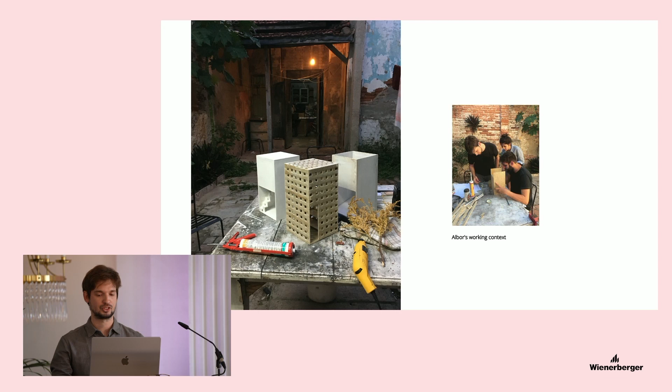In this sense, then, what brings singularity to this context is the union between the professional and the popular issues, propitiated by the absence of a legitimizing framework for the independent practice of architecture, which in the end we understand as experimental and not certified. In the absence of clear construction regulation and a hierarchy of competences, typically regulating relationships get to be managed at the level of words and practical actions.

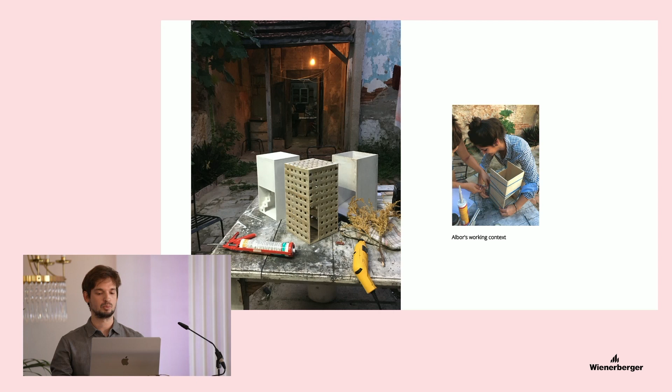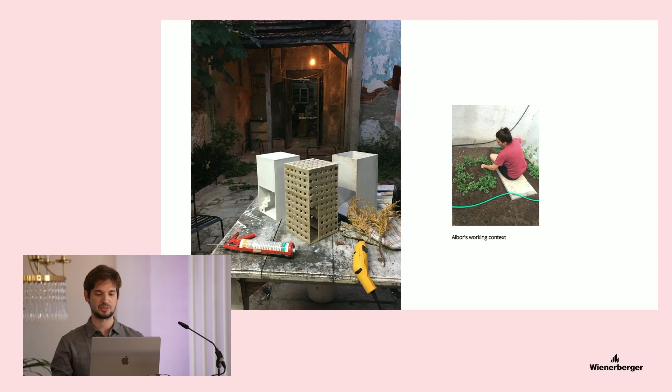Almost all the implicit professional hierarchies between the architect and the builder are diluted, and the usual sequence of the architectural project, the linear structure of conception, technical plans, and construction, is transformed into a directional multiplicity system.

The undermining of the construction tradition and the technical knowledge, together with the situation of the material market, make technical forecasting of solutions almost impossible. It determines that the presence of the architect at the construction site, as well as the close relation with the builder, is indispensable for the achievement of the architectural work.

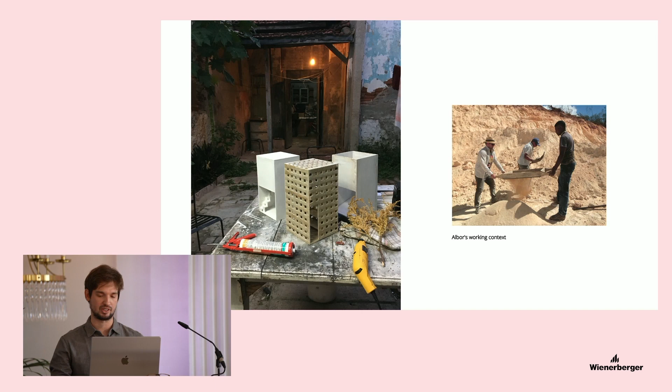Casa Torre, the project that we are going to speak about, catalyzed within the process of optimization and constructive adaptation of a reality that Albor has developed in recent years. The prospect of an uncertain future shaped the program of a single-family home for one of Albor's architects, a flexible and progressive house that is answered by raising a tower, a constructive core from which to overcome the challenge of the work.

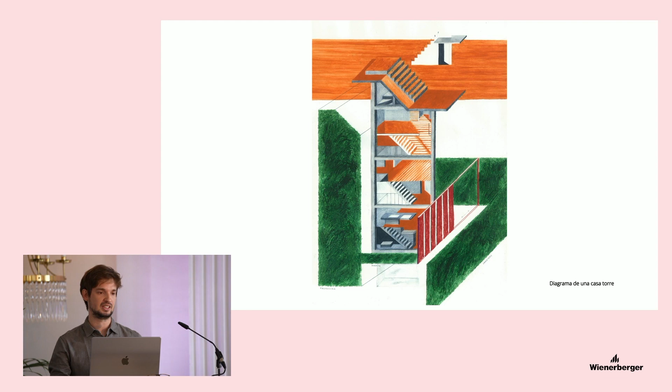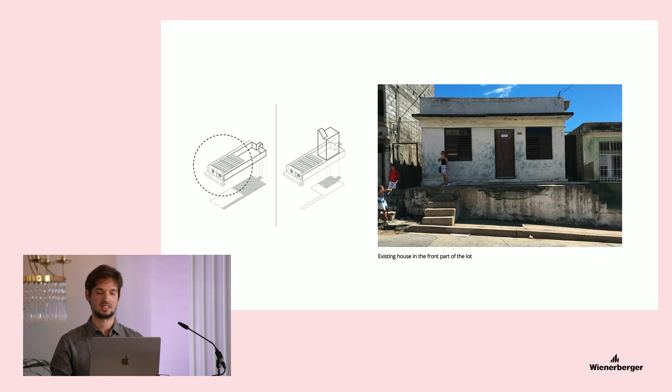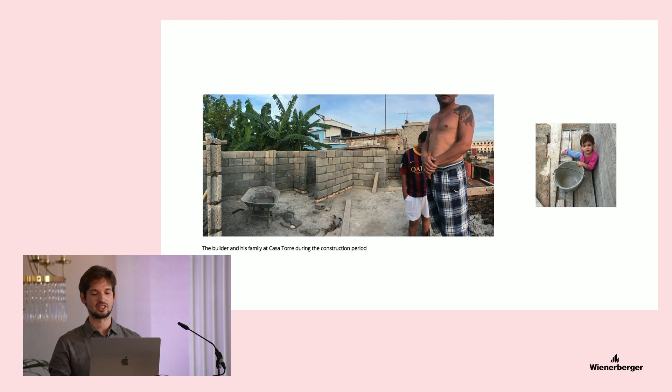The multidimensionality of this process, as is to be expected from what we have mentioned so far, includes material and social connotations. For example, the builder and his family lived during the construction process in the existing house in the front part of the lot. The builder, who came from a rural area, reaches this verbal agreement for the benefit of his family and his own work, while his wife and a little daughter had better access to primary services, and the builder could have custody of the materials that were carried and the control of the execution.

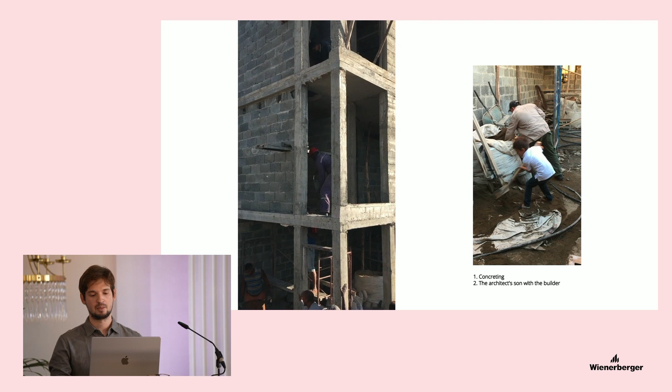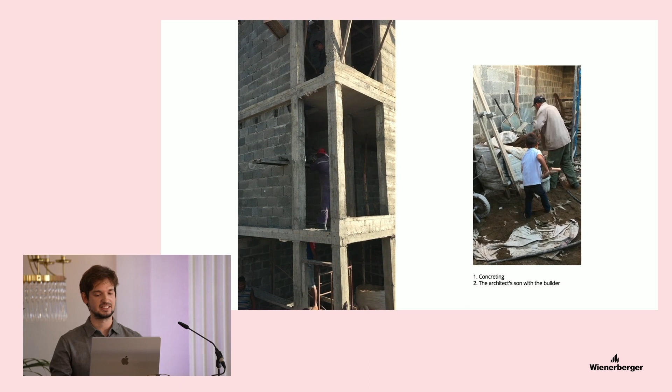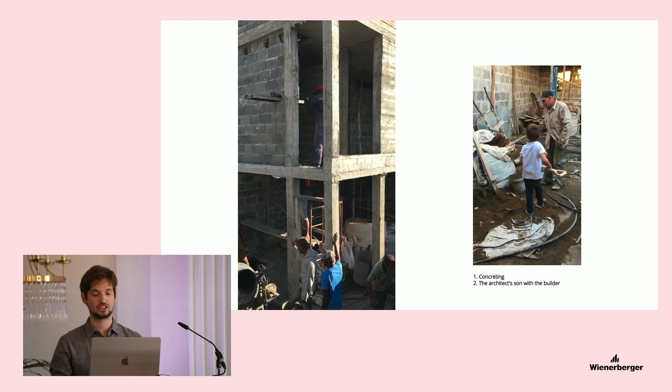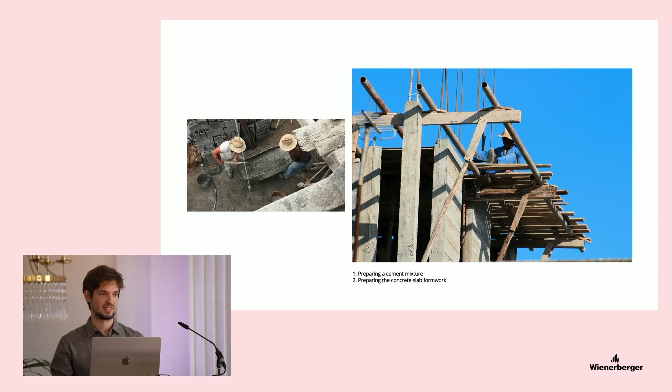Likewise, the architect, in this case also promoter and user, participated daily in the construction of the house, sometimes as a supervisor and other times as the builder's assistant. This kind of experience of the site, this caring, allowed technical adaptations to be carried out in a consensual way throughout the building process that resolved the apparent challenges during construction, like different material supplies, cement of dissimilar origins, non-certified aggregates, and the absence, for example, of lime and additives that required experimental reduction of the mixtures.

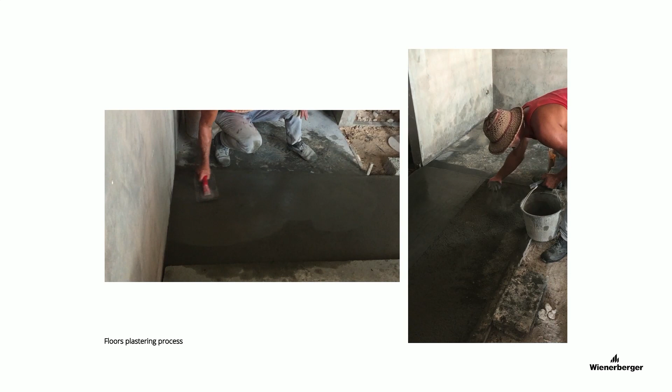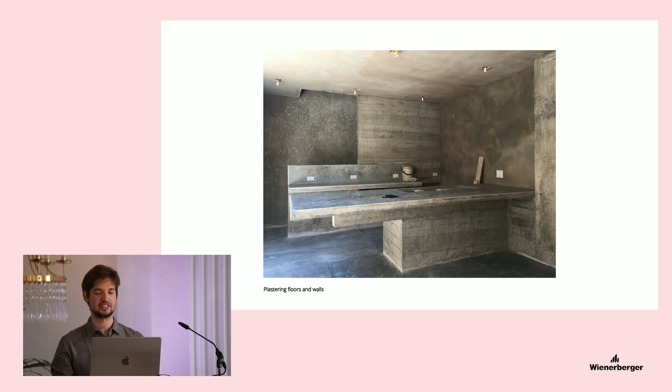This kind of adaptation was necessary, for example, for the reinterpretation of traditional techniques such as plastering floors and walls. In this video, you can see the making of one floor solution. In this particular case, the recovery of the concrete plastering technique for floors and walls is a recurring technical element of the project. After several attempts in many projects, we have reached its natural incorporation to the process. In the project, for example, of El Apartamento, early in 2019, we made a deeper exploration of the possibility of the material, using it even in some furniture, like the table.

Another interesting example of this is the solution for the carpentry, which is another significant symbol of proceeding under blurry regulations, because this is an artisanal carpentry, and once again, the artisanal is tied to the precarious and not to some romantic condition of the handmade project that maybe we manage in other conditions. The windows are shutter carpentry entirely made with aluminum, cast in local and domestic businesses, very irregular ones, where the entire casting and molding process is carried out in a very rudimentary way.

The use of this handcraft carpentry, to which low-income people have access, has been explored in other Albor projects. What interests us from this solution is the double condition of its use: the imposition from the economic point of view, and the semantic exploration value that it expresses in the relation that it establishes with the self-constructed city.

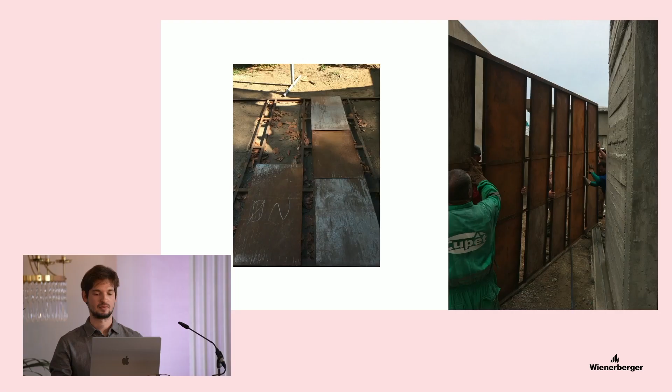Finally, another example is the ground floor gate solution that was materialized and designed at the end of the project, based on the clear idea of opening onto the patio. The door was built with material recovered from an amusement park that had been dismantled in a renovation process. These pieces, which had been part of the city for many years, have a symbolic character associated with the state intervention in the public space. They were recomposed, forming large proportion sheets in an also domestic metal workshop.

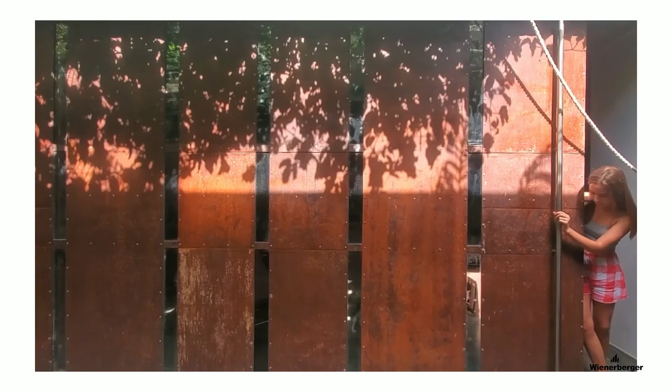The idea that the material, which comes from the state construction programming, experiences a second life from an act of unregulated reformulation is also a sign of Casa Torre's performance and of our design approach. The material reformulation process of the idea traced from the project, which in our case is handled as a paradigm, adds interest to the dialectical reformulation component of the idea or concept. The project remains alive once the conception stage has been overcome. The projection is perpetuated throughout the construction, its conceptualization linked to the material, and the execution articulated throughout this dedication.

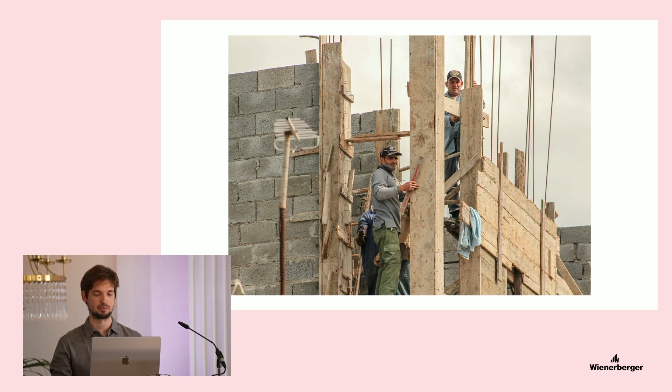It is this working condition, the craftsman-professional relationship, the construction from the site on a day-to-day basis, and the spatial adjustment and the comprehension of the place beyond the initial project that we understand as beauty through craftsmanship, achieving a certain primal dignity. We have to say that this is a diffuse beauty, based on the expression of the self-generated, of a widely mediated site, of a craft of effort, this recurrent idea, perhaps naive, that explores a central root of architecture. That is all. Thanks.